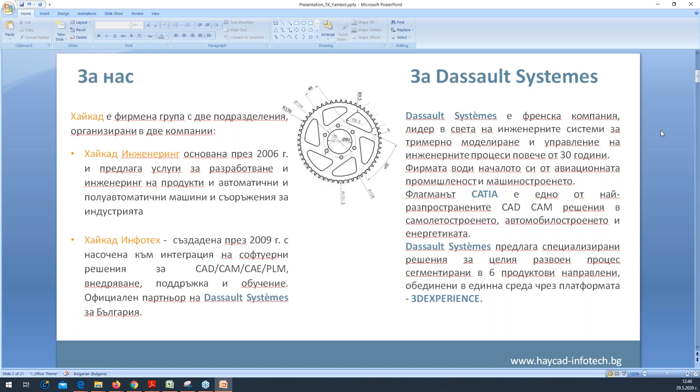Няма да навлизам в повече подробности. Ще кажа по отношение на презентацията днес - бих искал да представя нашия лектор днес, когото успяхме да мотивираме и да спечелим, да отдели от своето време, да направи презентацията главно за вас и да покаже някои новости и интересни фасети.

В сферата на автомобилното осветление и по-точно как се разработва автомобилното осветление днес. Какво значи автомобилно осветление? Това са всички предни и задни фарове и задни стопове, които днес представляват една изключително комплексна, сложна система, в която може да намерите механика, термодинамика, осветление и оптика, електричество, електроника, дори вече софтуер, и всичко това събрано в много малко място и ограничено от изискванията на дизайнерите и тези, които създават стайлинга на автомобилите. Така че доктор Бодуроглу ще ви разкаже малко повече от кухнята и се надявам да бъде много интересно за вас.

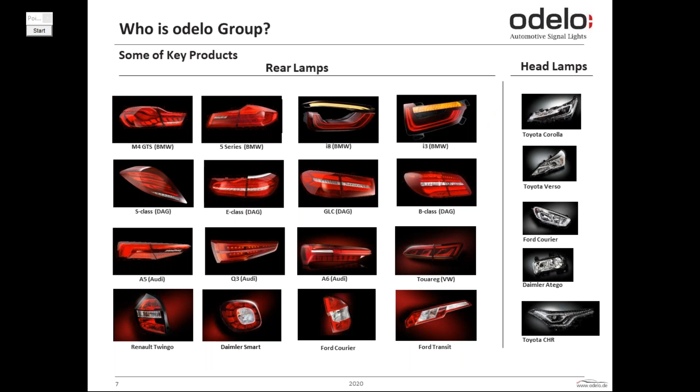Some key products from our portfolio. We mostly work with well-known OEMs in Europe, especially German OEMs like BMW, Volkswagen, Audi, Daimler, VW. We do design, and we also have headlamps in our production portfolio in Turkey mostly. So we are working for Ford, Daimler, also Toyota. If we speak about our innovation path throughout the history of our company, we have some innovation portfolio which makes some breakthroughs in the design of lighting.

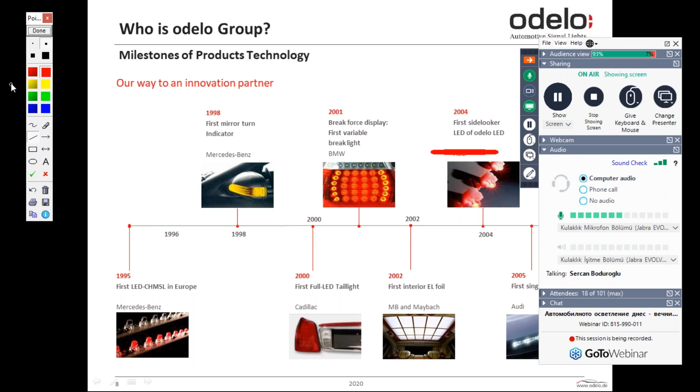At that time, ODELO Group also had its own LED production factory in Germany. But later on, we strategically moved out from this sector. We made a strategic engagement with Osram for LEDs - we use their LEDs and we sold our LED factory.

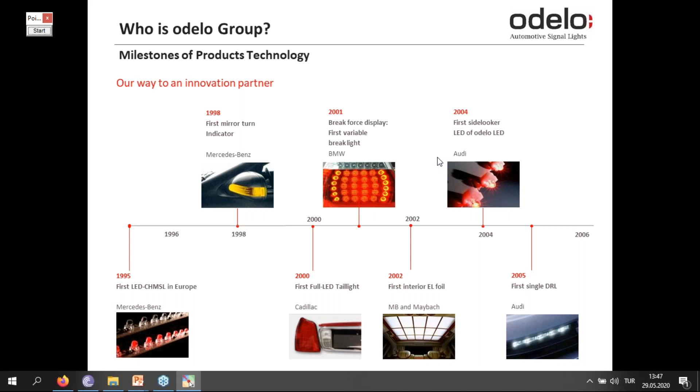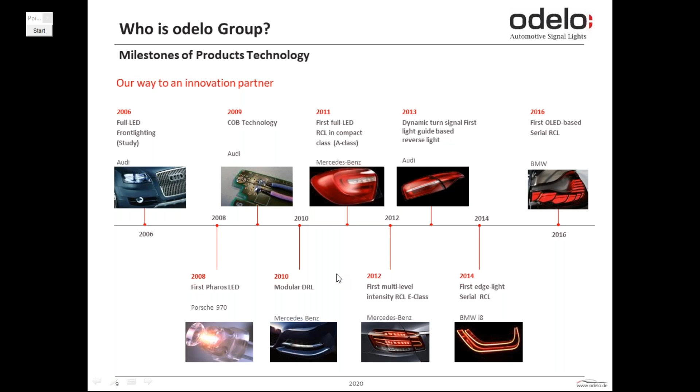Going on from the innovation levels, we continued to make interesting studies in the lighting sector, but the last level we are proud of is the first OLED-based tail lamp in the market. Actually, as you may already know, OLEDs are becoming more and more interesting in designs, and with the BMW M4 GTS version, we were the first company to make a serial design for OLED in the lighting sector.

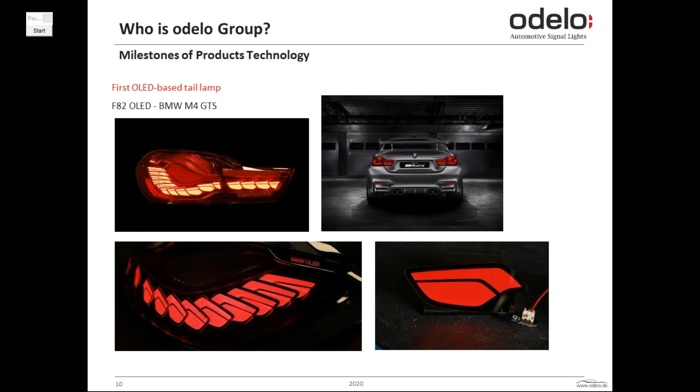Actually, it's simple lighting, which makes us see the road, be seen by others, and get contact with others. This means when you turn left or right, you activate your signal and say, I am turning left, I'm turning right. When you slow down, you put your foot to the brake pedal and activate the stop function. So it makes a connection between the other drivers.

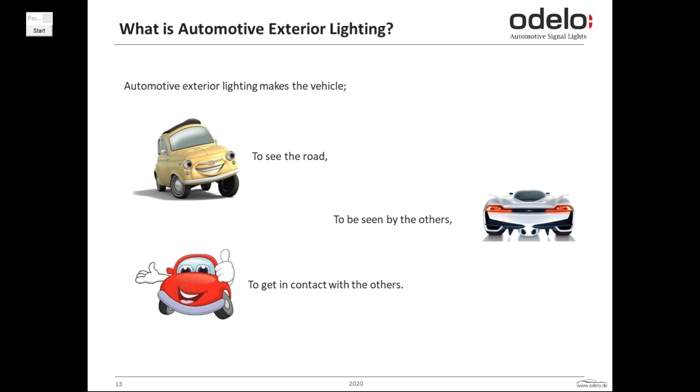From this perspective, we describe lighting as one of the senses of drivers. It's really important. Functionality is important, but on the other hand, just functionality is not enough, because lighting became one of the major stylistic parts of the car.

For example, just assume you are driving in the street and one car behind is coming with angrily-looking lighting in front of you or behind you, and you're a little bit afraid. You want to give the road to the other driver to let them pass. Or another car comes with an old model Volkswagen without anything sensing, no stylistic input, it's just a car. It completely makes a different sense on the driver's side.

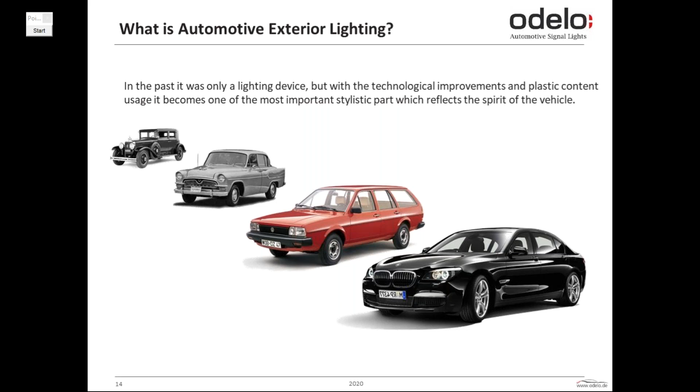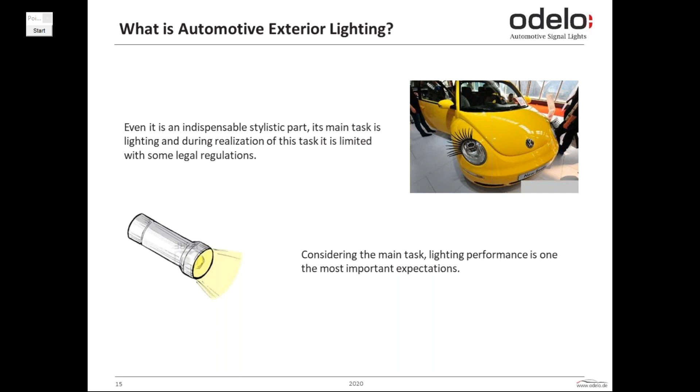So it's really important for the sensing of driving, the stylistic input is one of the key parts for exterior styling. But at the end, this is the stylistic part, indispensable but still styling, the main task is lighting. So to make a lamp, we should be under control of some legal regulations, and in doing this main task, lighting performance is the most important expectation for us.

Let's speak about now how to develop. This is the part which will go all over the world. It will become a car which will be under desert conditions maybe, or in mud, vibration, rain, dust. So basically whatever extreme conditions exist in the world, it must be survived by our lighting part. This is the first input for us, to be strong enough under these extreme conditions.

This kind of input comes from the customer, depending on the market, and also depending on the expectation of the segment. For example, we have different expectations from Volkswagen Passat versus Volkswagen T-Roc. They are different markets with different expectations. If you want to sell the car also to the desert area, you increase your expectation for temperature behavior. So this can vary, the expectations can be very different.

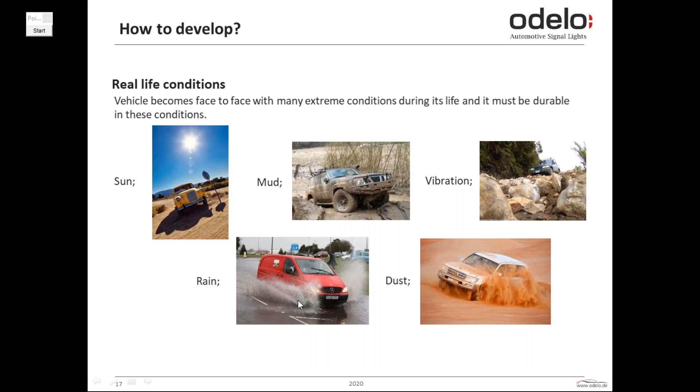But at the end, there are always main headlines from this, which means they always ask about temperature, they always ask about rain, they always ask about dust. This is something which we cannot avoid. This is the first expectation, which means the life cycle you should survive. But the other thing is also stylistic, which we mentioned.

Style. This is one example which I put in the picture, the 2009 design Renault Twingo. It's quite a simple lamp, we have only 3 bulbs with one lens and one bezel. But even with this simple lamp, you see how it's changing during the design, how the style changes step by step. So we go step by step to meet the customer's stylistic expectation, also considering production, also considering the input of tooling and production facilities. Everything should be concentrated during the design to reach the final level of the part.

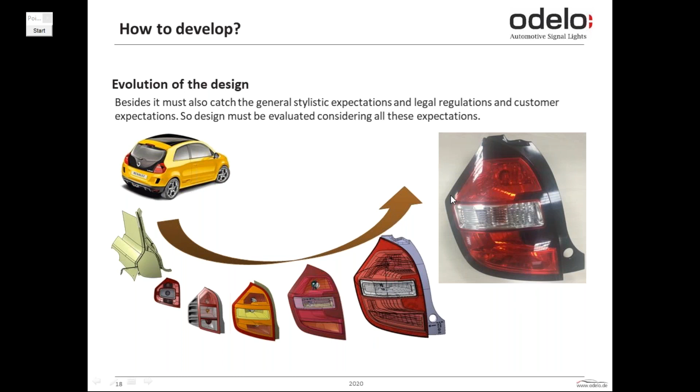This is the cycle of our development. Let's step by step go through this page. First is stylistic input, this comes from the customer as already described. Part design is one of the major things which we have to do, it's a framework. Optical design, we have to control the light. Thermal management, since the light sources always create some heat, which we have to control. Structural management or structural engineering, our lamp has to survive under extreme conditions.

Mold engineering is also important for us because our parts are mostly produced by plastics. Plastic means tooling, tooling means injection, and this is quite sensitive to make good production. So we have to care about this during design.

Test and material engineering are also important—we have to know what kind of expectation comes from the customer. And electronics is one of the major areas in recent years because nowadays lamps are going more and more electrical for every OEM.

Prototyping is the last level before design goes to production, because we have to control in prototype what's going on—how it's working, is it good enough, or should we change something. It's not easy to check it just from the web, from an application, or from CAD.

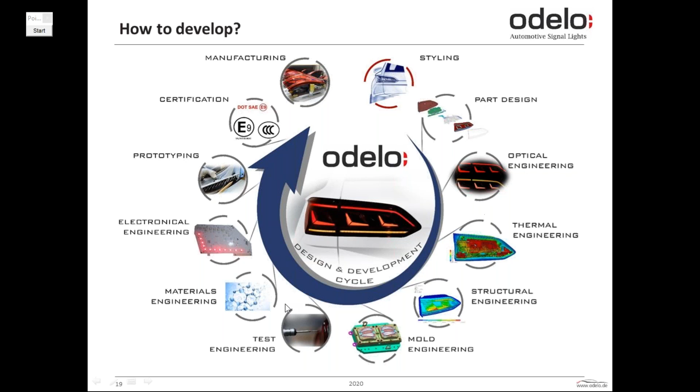We should also touch it physically. Certification is needed before production to sell it officially, and production is the last level to go to manufacturing. This is the development loop for us. Let's go a little deeper into the disciplines.

Optical design: light is an energy particle, or photon, which has a visible wavelength for us. Photon is a particle that moves in different wavelengths from minus to plus infinity, and each wavelength has a different energy level. What we look for is only the visible wavelength, which is a really tight, narrow zone.

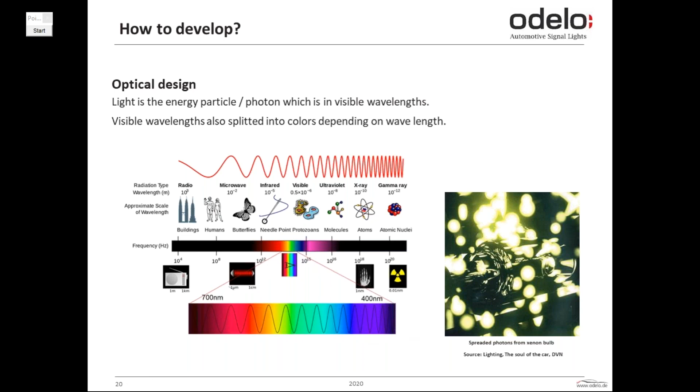If you consider all wavelengths, the visible range is only between about 700 nanometers to 400 nanometers. Even within this area, we have different colors instead of one full package. So we actually care about this area for the photon.

The light sources we create are quite well known by most people. For automotive, we first used the incandescent bulb, and this bulb has been produced for 100 years. It's basically produced using a radiative energy approach.

When you heat up the tungsten filament, this creates a really high level of radiation energy, and this radiation energy extends a little into the visible area as well. So you create light from the radiation energy.

But even though you create light from radiation energy, a really high portion of the energy still remains in the infrared zone. This is the real inefficiency of the bulb. We try to create light with the bulb—you create maybe 5% of the light in the visible area, but 90% is invisible, infrared, which becomes a trouble for temperature. We have to control this temperature; it's a loss of energy.

The other type of bulb is the xenon bulb. It was quite a luxury bulb in the past, used for high quality, expensive cars, but nowadays it's been exchanged with LED.

In the xenon bulb, an electroluminescence system is working, so there's no direct radiative energy. It uses the chemically generated light output from the inert gas inside the bulb.

Nowadays the most used light source is LEDs, light emitting diodes. The LED is extremely high performance compared to the bulb, and because of this we have enough efficiency, and its lifetime is also extremely high compared to the bulb.

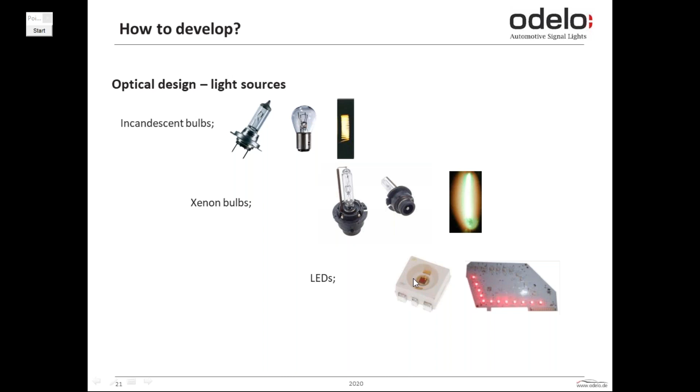Optical design: when we speak about the light source, now we've created light from the bulb or from the LED. The main purpose for us now is to send the light where we need it, where we want to send it. From this perspective, optical design has two main purposes in our lighting systems.

First is to send the light to meet legal requirements. At the end, light goes to the eye of the other driver, or light goes to the ground in front of you to illuminate it. So you have to send some light to the target that needs to be illuminated—this is a physical amount you have to send.

But the other important thing, which I expressed already in the beginning, is stylistic. Stylistic means the opposite side.

We should now look to the light source itself, how it looks like. So now we are not looking anymore where light goes, now we are looking to the light source itself, so it's most of a rear lamp. When we go to back side of the car, we have to also see a homogeneous light distribution or stylistic expectations of really fitting what they want. So with these two main purposes, we have to manage light physically.

To manage light physically, of course, there's limitation. All of us knows if there's a light, it could go to a material, which means it's transparent, or it could not go to a material, which means it's opaque. If it cannot go to material, there's two options: some of the light could reflect back, some of the light is absorbed by the material.

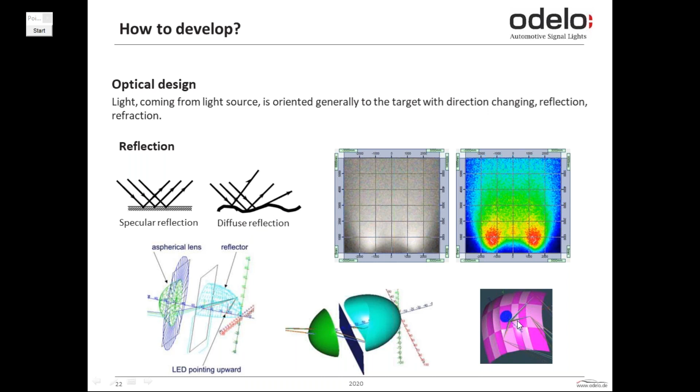We mostly use parabolic designs in the beginning, and later on we make small updates in the optic surface. The other is internal reflection, which is also critical for us to achieve the last level of stylistic expectation. Internal reflection means if we think about light which goes through one transparent material, each medium which has transparency has a different refractive index. Depending on the refractive index ratio, the light has a critical angle which could make an internal reflection. I want to express this with an example.

Let me explain what I'm trying to show with this example. If we are in a natural area, and if there's a lake in that area, when we look inside the lake we will see under the water — if there's a rock, we see it — if we look perpendicular into the water. But if we look a little bit far away, and if we sit down and look at the water with an inclined angle, we will no longer see inside the water. Instead we will see the reflection of the mountain onto the water surface. This means we have already passed the critical angle, so now the surface of the water becomes a reflection for us.

So we use this principle in our designs as internal reflection in plastics. We call it a light guide, or light bar — internal reflection. We send the light inside the plastic tube, and this light theoretically travels inside the tube at an angle under the critical angle. Sometimes, at certain locations, we put prisms and send the light out from this plastic tube just to make the light visible.

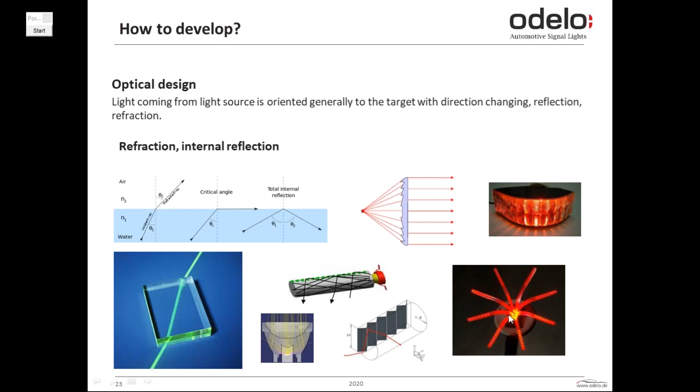So here you see the screen, with some examples of light bars and light guides. These light guides make it quite easy to create different shapes of designs. Here, this is one Daimler lamp you see — it's a plastic ring completely around here, and we illuminate this plastic with only 2 LEDs in between. There's a whole shape lit with just 2 LEDs. This is another Daimler A-class example.

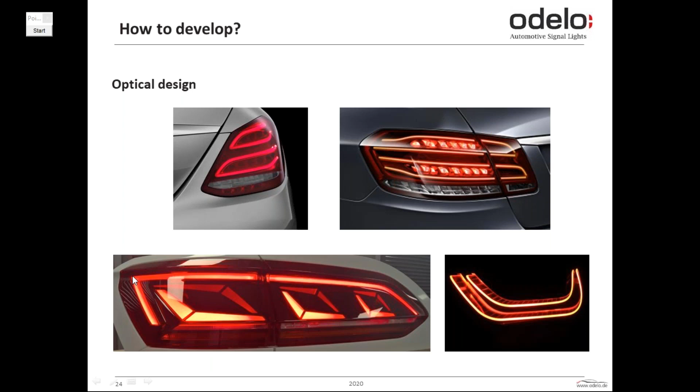When we have light and we shape it optically, at the end the light source produces some light which we use. In doing optical design, of course, we have some inefficiency where we cannot use all of the light. But also from the energy point of view, there's inefficiency at the source, meaning the light source creating the light cannot convert 100% of the input energy into light. There will always be some loss depending on the light source. This lost energy appears as thermal energy, which means we have to control thermal issues in our lamp so they don't cause trouble for our design.

If we speak further, what's the thermal? What is heat transfer?

So we have 3 modes normally, everybody knows this. In thermal, we have conduction, convection, radiation. So conduction is between solids, convection between solid and fluid, and depending on the force, flow is maybe forced convection or natural convection. Also, radiation is without any medium.

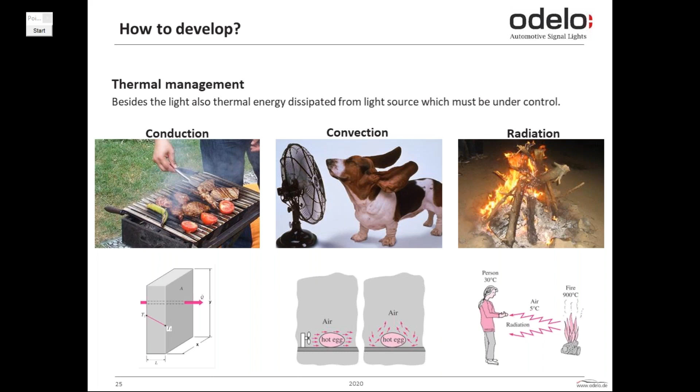We have a derivative light source. If we think about it, in our lamp we have all 3 modes of heat transfer, which we have to consider when designing. So if we think about the bulb itself, it produces light with a tungsten filament, which creates full radiation energy.

So some of the radiation energy goes to the visible area, which we call light, but most of it is still in the invisible area, the infrared area, which has extremely high radiative energy. So we have to think about how to dissipate this radiative energy from the lamp without damaging our plastics. On the other hand, through the air inside the gas or around the bulb, there is also air which flows internally, and it makes convective heat transfer.

Plastics or metals also conduct heat. So these modes are all in our lamp, and we have to care about how to manage and dissipate heat. What is the basic approach for our side? We should send the temperature to a safe area. We have to move this temperature to the safe area to avoid defects on the plastic or on the light source.

From the LED point of view, it's quite different than the bulb, because the LED itself doesn't create much radiative energy - it's actually a negligible level. But in LED, it mostly produces conductive energy, which goes to the electrical board. And on the electrical board, we try to manage this conductive energy, first using conduction through the board, which requires making a layout design.

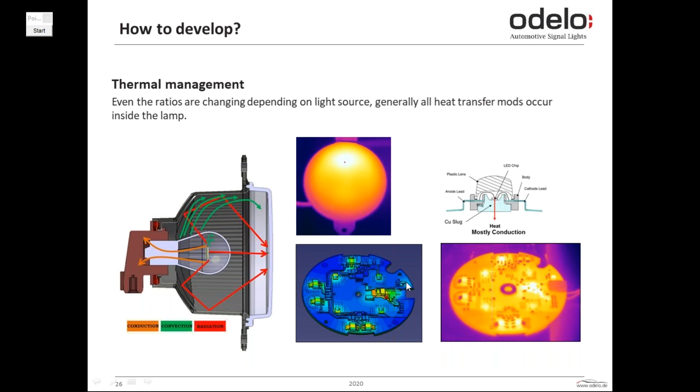We try to make an optimized layout design to increase the temperature distribution in the board. And of course, when we increase the temperature in the board, it's in contact with air, so we should also think about convective heat transfer across the board.

Electronic design. LED light sources, which are quite new - used maybe 15 or 20 years in lighting - bring the necessity of electrical design and usage. In its simplest definition, electronic board design is handled to have the necessary functionality within geometrical limitations, of course considering thermal dissipation on the lamp.

So we have to make a design that is electrically sound, fulfills the functionality, fulfills the thermal requirements, and fits within limited geometry. This is the first input. Electrical brings us much more functionality actually.

In the bulb, you have one bulb and you can switch it on or off from the car. But just imagine if we have many LEDs in the lamp, and we have enough intelligent possibility to manage these LEDs in different ways. This gives us functional flexibility. We can play with the light sources. So electronic design gives us freedom to create different functionalities, which becomes a step forward for software usage.

But another important topic for electronic design is electromagnetic compatibility, or electromagnetic interference, which is quite important for us. Just imagine if you push your foot on the brake pedal, but your brake lamp doesn't work because your radio is switched on in your car. Your radio affects the electrical board in the rear lamp, which blocks the light. It's possible actually. So from this perspective, it mustn't be like that - we have to be careful.

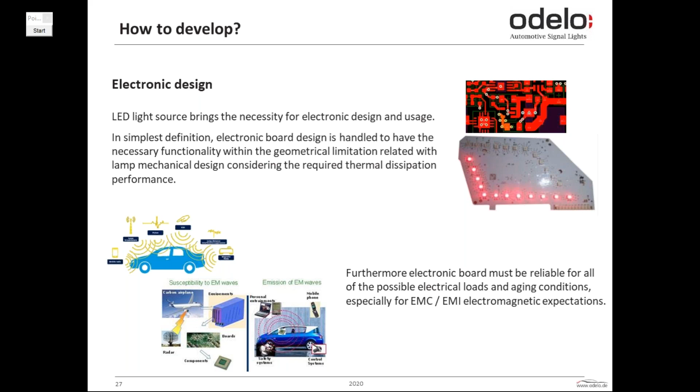In this rear lamp, we have different animations, which we manage with different software. To make the software work, we need microcontrollers, and the microcontrollers manage different LED sources in different ways.

When we introduce software, it brings much more complexity, because now you also have to be sure that the software is safe enough to fulfill legal requirements. Before, when we used only simple electronics, there was one single lamp connected to a single car, and the car sent an electrical connection to the lamp to activate its function.

But now if we use software, the lamp takes software inputs from the car and has to think about what it is and which function to activate. In this perspective, you have to be sure that your function is right. Just assume that you make a left turn indicator signal, but your car makes the right turn indicator instead. It's possible, and it's a big trouble. I gave this example honestly because we had the same situation in this project.

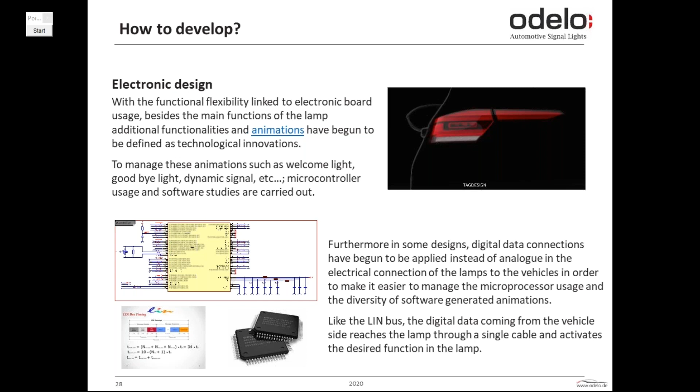If we have software, as I said, this kind of trouble can happen, so we have to be sure that the lamp will survive in extreme trouble situations related to software. So it pushes us to use functional safety, and it pushes us to use the ASPICE approach during design, which is also the next level of expectation during the design of exterior lighting.

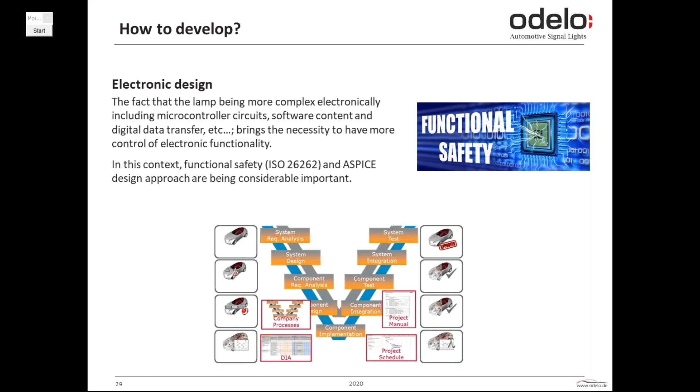And mechanical design is something too. It's maybe the most conventional design facility during the lamp, because it's always there, mechanical. Even when you make a design in the 1950s, you make a metal part, you make a glass design, but then you make a mechanical design. So mechanical design is also from the beginning always with us, and it's the framework of design.

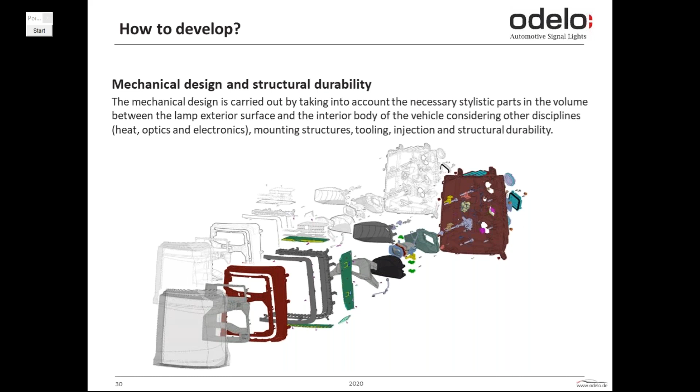You are making a mechanical structure which holds all the parts. This is also one of the major important facilities for us, to combine all the parts together in the proper way. And mechanical design of the lamp always starts from scratch, because of course we have structures, clippings, screws, but always with the new design, always with the new style, you have to redo and restyle. We check how to make the mounting, how to put the parts, how to mount them in production. It's always starting from zero for each design.

For example, optics wants maybe a larger area in the plastic, but this is impossible for tooling. Mechanical wants to make a screw in the middle of the plastic, but optics says no, you cannot put the screw there because it's a visible area. Thermal says I really want one meter square of PCB area, but electronics says no, you cannot do that because I don't have this area for the electronic boards. It's always like that. So there must be a balance between them, and this is actually the pure strategy of design, to make a balance.

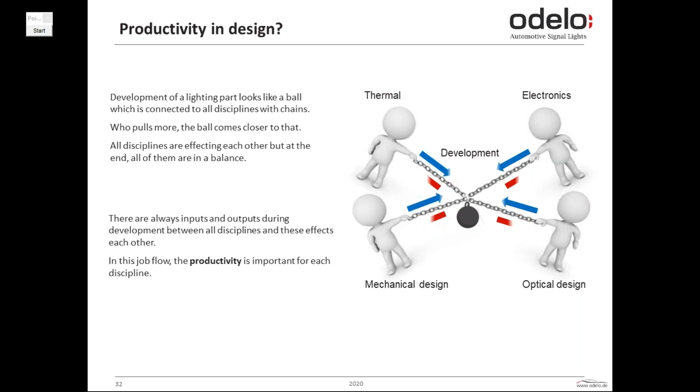Just imagine that there are many inputs, but you cannot process them in time if you make a serial connection of all of them and wait step by step to solve them. It's impossible. You have to be really productive to think about the inputs to make an output, and all the boundary conditions during the design are also moving. You cannot wait to finalize the optic design, and optic design cannot wait to finalize the mechanical design, because they have to move together. So that must be productive.

Just consider, for the mechanical design, we have to be in line with car body. So car body will come with some updates. Optical surface will come with some updates. Stylistic will have some updates. Mechanical mounting concept will have some updates, because we have to think how to mount, and later maybe we change it. Also production will make some updates. Just think, you are sitting at your table, and every time there are some new inputs to your side. What should you do? Should you wait and just stop them, or should you do really fast response for each update?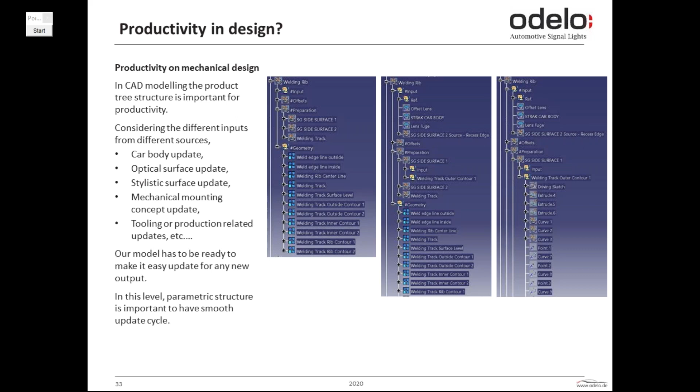From this perspective, our CAD structure really must be at a mature enough level to make updates at the right time. This is important for parametric design. I want to show two examples in parametric view. So this is one design. Now we are designing for Daimler. This is a reflector which makes a tail function with indirect reflection.

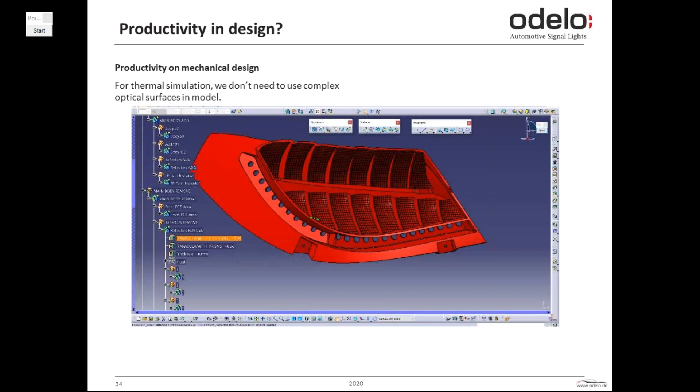In thermal simulations, we use a finite element model, which is as common as CFD modeling. In these finite element models, you mesh the structures in the thinner parts, and this mesh is one of the beginnings of the simulation, and it's really important for accurate simulation. In LED modeling, radiative energy is not so important, as I said, it's negligible. That's why these really thin optical surfaces are not so needed in the simulation. If we can remove them, it will be best for the thermal guy, because they really don't need these small optic elements.

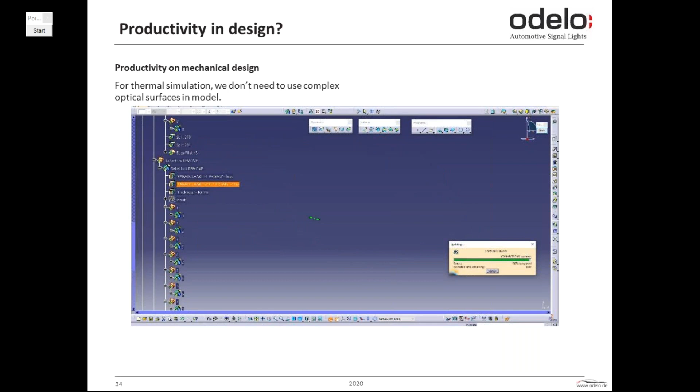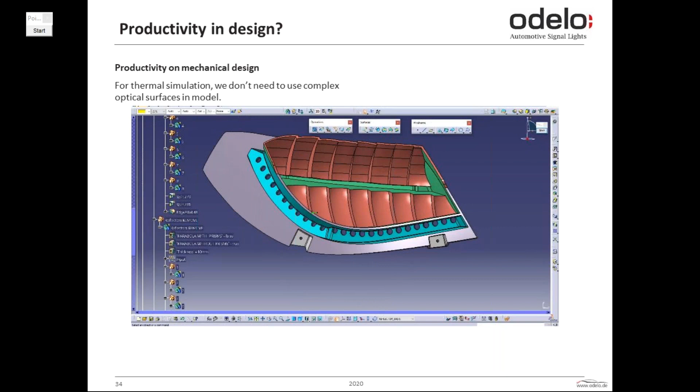Otherwise, let's think you try to remove them step by step. Somehow you use maybe generative shape design, maybe you use remove surface from part design. It will be hell to remove all the surfaces. But if you build your structure to manage this update in the future, it's one click for you. This example I want to give you here is on productivity of CAD design.

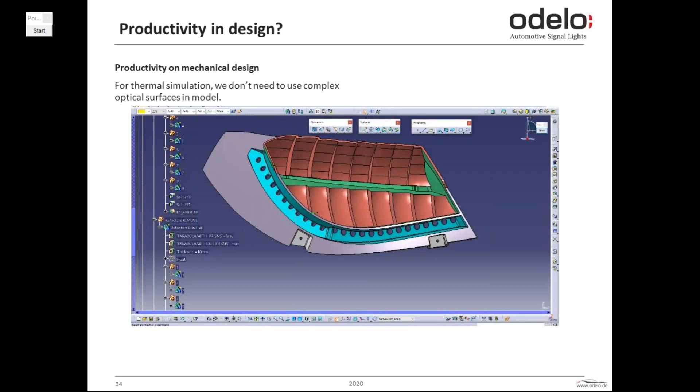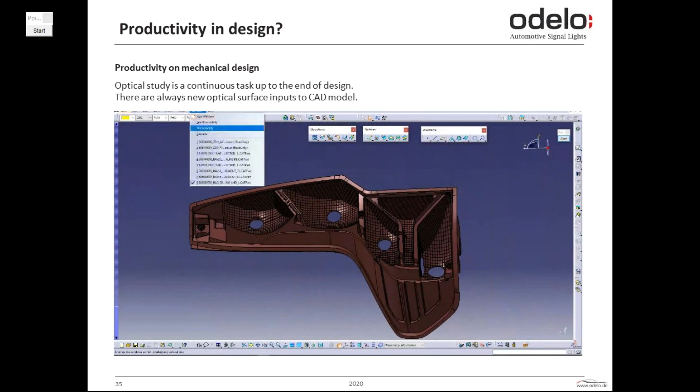Another example here is optical surface. Again, optical surface - we have many optical surfaces, and optical design is a never-ending story, extremely never-ending. Even in Toolgo, for us Toolgo means the start of tooling production, which means design finishing before production. Even for Toolgo, if I ask my optical departments, I say, I want to give you 2 more weeks, do you want to use them? They will say yes, we want to use them, because they will never say finished.

It's always, you cannot catch 100 percent. You are always at 90, 93, 98. Whenever you have time, you continue improvement. So from this perspective, of course at the legal level we have to keep a certain level. But from this perspective, optics are always updating for the next level. To integrate these optic surfaces into our data, we have to find the best way to make easy updates.

Just imagine that you make a housing with reflective surfaces. Optic surfaces are given to you 1 week ago. You spent 1 week to import these surfaces into your housing.

You built a really solid data. It's really perfect, visible. Everything's good. When you finish data, optics comes to you.

I make one more update. I want to use this surface. Can you adapt this? And you will get crazy. Okay, I just finished this now. Why did you do it again? You'll get crazy if you're not prepared enough. That's the purpose - we should create a really right modeling in the CAD to make an easy update in the CAD modeling with new inputs.

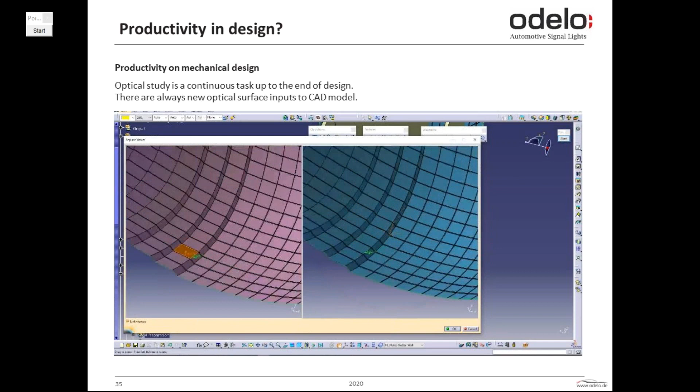Here in the picture, you see the replace surface working on our optical surfaces. When you make a replace surface, it automatically updates our optical surface in the CAD modeling. This is a good example to see what's needed to make a productive CAD design. Of course, to make this strategy, you have to build a really good structure of the CAD modeling to make it an easy update.

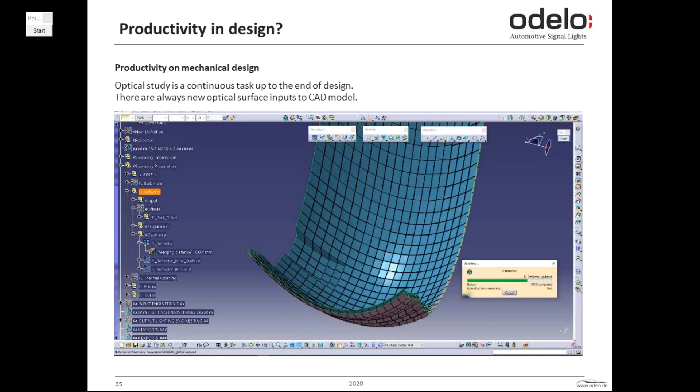Otherwise it will not update properly. You will see some troubles, you'll have to fix the file. Maybe if you use some sweep, it will not make a sweep - it's trouble. So you should make a structure with good levels to make updates easily.

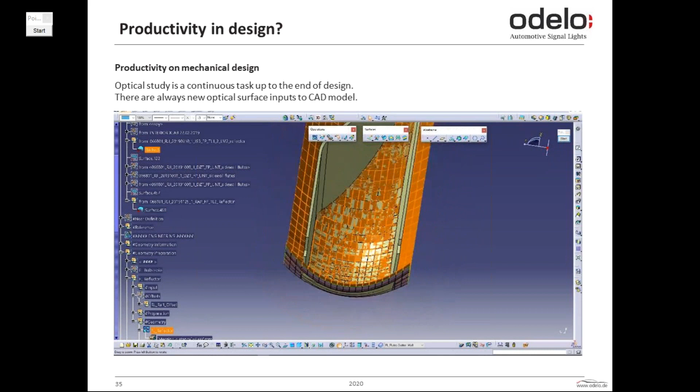How to link between design and production - this is also one of the important links for production, because most of the production guys always blame R&D. It's impossible to close their mouth because they are looking from the production facility. They don't know what we are dealing with in design, because they don't know what inputs we have, what kind of troubles we are doing.

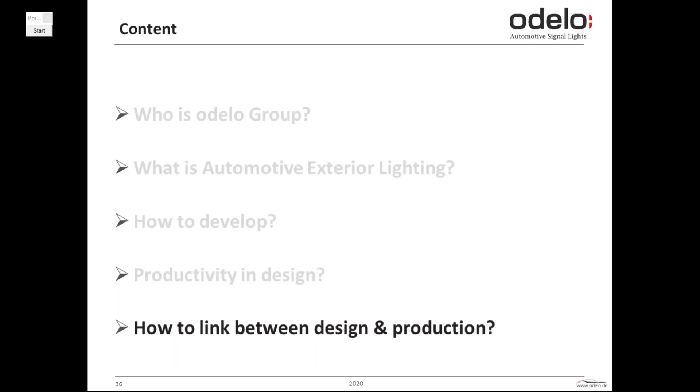They just know how to produce, because this is logical for them. It's normal. And then they will produce this lamp for 4 years, for 3 years. In this production, you don't see what they are doing - they are going live with this lamp to produce.

From this perspective, we also really have to be sensitive in production. Our lamps are mostly thermoplastic materials, which means injection - injection of the materials is built in tooling. And from this perspective of tooling and injection of our materials, our design must be feasible for serial design or serial production of the part.

Actually, I have many experiences in production facilities. For example, when you make a really limited design, in the tool, each week you have to make maintenance on the tool because of this area. The tool always has trouble, and the production quality is reduced and the scrap ratio increases - this is always a hell production for the whole life.

But if you make a stable design, which means the tool is working properly, injection is working properly, everything goes properly. Of course, there are always some troubles - there must be some, because that's why we are here. Engineers are here to solve the troubles, but the basic idea is to make it as much of a less-troubled design as possible for the future.

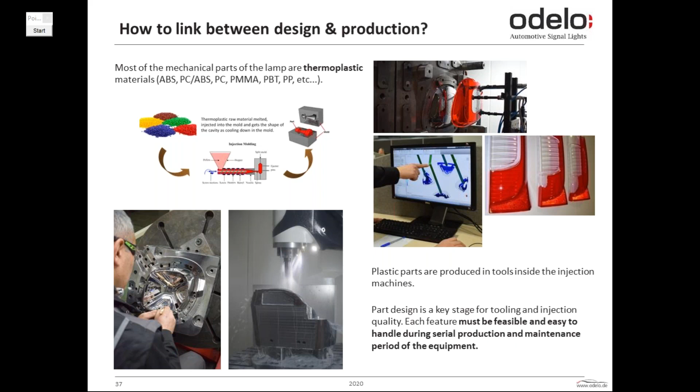Let's speak about the mounting concept. Depending on the complexity, of course, our concept changes. Here in the picture on screen is the Volkswagen Touareg lamp. Each mounting concept must also be feasible for handling the production and assembly line, and then these are produced in production, as I said.

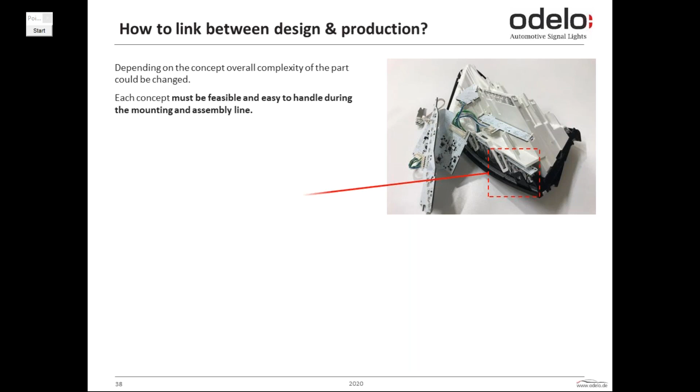Let's consider only the clippings. Simple example: here in the picture, we use different kinds of clippings to mount this optical element to the bezel and to the carrier, between the PCB. We also use sandwich mounting - sandwich squeezing between the PCB and the optical element. So it's quite a complex area with clipping. All clippings must connect in purpose, to the target here.

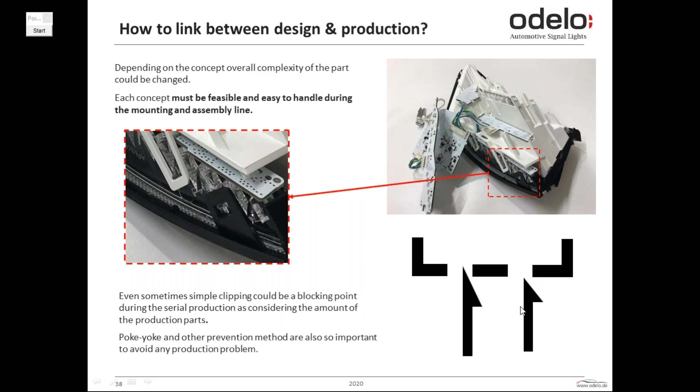Just think about the surface clipping - you see the difference between these two surfaces. Actually, the pitch of the clipping is the same, just the angle of the surface is different. It's simple to see from this picture. If you have a more inclined surface, it needs less force to clip it; this other one needs more force to clip it, so it's easier to clip. Just for this surface, in CATIA, to make a draft on this surface takes one second - you choose the surface, you make an angle, that's all.

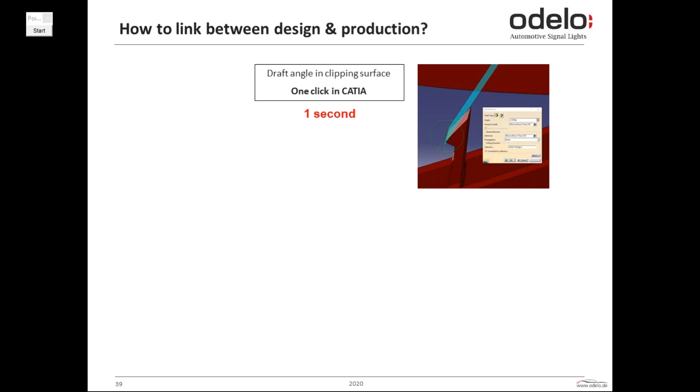Let's think about what this affects. If there are 4 clippings on the part, and if we produce 50 lamps per hour, working 3 shifts of 8 hours, for 3 years of production with approximately 300 working days, the final output is 4 million clippings for the whole life. To make a 1-second click decision in CATIA will affect 4 million clippings over the whole life. This is a really simple example, just to make a map in the attendees' imagination.

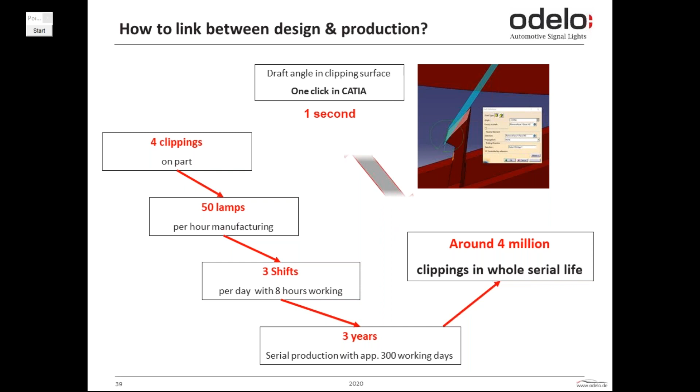It's not the real case. Of course, we have standards for the clippings, but just to show what is affecting. Just for one surface, it could affect all life production. So designer must know. It will be really important for production.

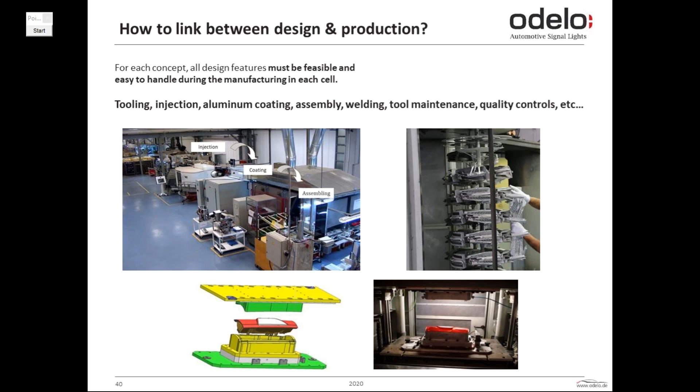From production point of view, of course we have many different production facilities we have to take care about: injection, tooling, aluminum coating, assembly, welding, tool maintenance, quality controls - everything should be under control. Sure, as designers we cannot know everything. If we knew everything, why would we need the other engineers in the production line? From this perspective, we have to think how to merge this kind of knowledge into our design.

First, prototyping is one of the critical steps for us to check what we are doing. Yes, I really appreciate we are using complex softwares for optics, electronics, mechanics, but at the end, this is a physical part which we have to touch with our hands.

In CATIA, you put one clip. I know many designers, when they get the prototype in their hand, they say, oh, this clipping is so small - I was not thinking it was as small as that. Because in CATIA, you zoom it, and you don't feel it's small. From this perspective, mechanical mounting with the prototype is important. We check it often. Also optical element, optical prototype.

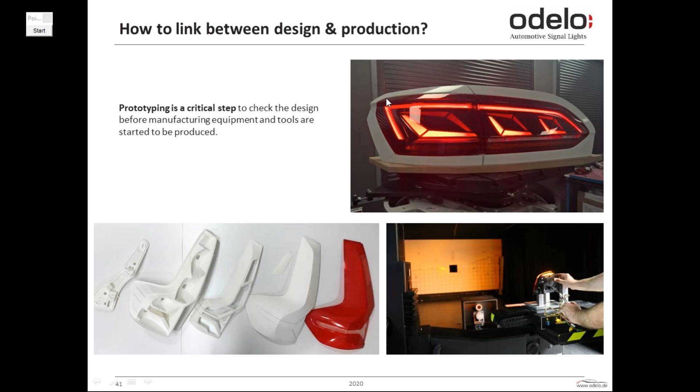This is an optical prototype in the picture here, Volkswagen Touareg. Actually, this optical prototype is one of the major customer milestones. We go to the customer, we speak about the light design on optical prototypes, and this is one of the major inputs in the design.

On the other hand, these are the two prototyping facilities we deal with for the design. As I said, as designers we cannot be the expert for all knowledge, so continuous and sustainable knowledge transfer is a key point for us.

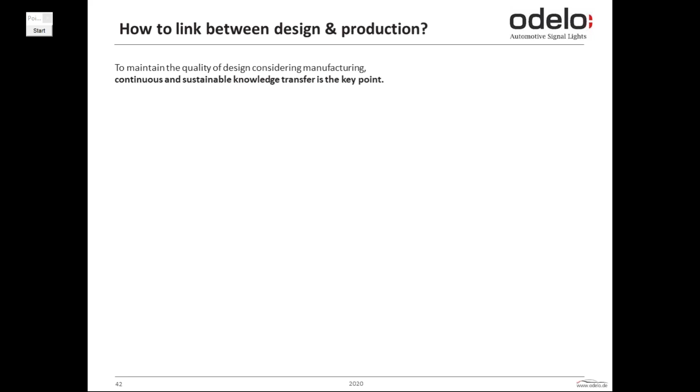So how do we do it? Of course, we are not discovering the world from zero, we are following the main automotive structures, as well known. So we use lessons learned, DFMEA, high quality data. Design review meetings is also one of the major things, because in design review meetings, the people who will deal with this project make comments on your design - from production, from tooling, even from process, they make comments on your design. Prototyping is important.

Reflection is also one thing we name - it's a Toyota name, reflection quality reflections. You follow up your quality topics for the whole life of the lamp, and you make some reflections to design. It's a system you put into reflection, and you check this reflection for future designs.

Checklist and design standards. Design standards is one easy example which looks linked to clipping also. For example, we don't want every designer to do clipping from zero. If we know that some of the clippings are well produced, well equipped with production, and compatible with the needs, we make the standard.

So we have a standard map. We choose as much standard design, doing standard structures, but please don't mix the standards to make an all-standard design. Actually, our designs are always unique - we have to think always from zero what we have to mount, how the optic concept will be done. But in mounting, for example, you should use the same screw - maybe the screw location will not be in the same position, but you don't make always different screws. This is the basic approach for design standards.

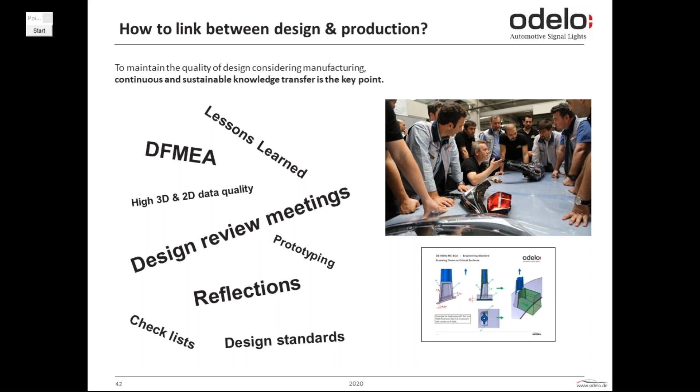At the end, all these activities increase our design quality, decrease the inefficiency and over-efforts in validation, process, legal approvals, and production quality is also increased with these activities. So it is really important to reflect design and production to each other.